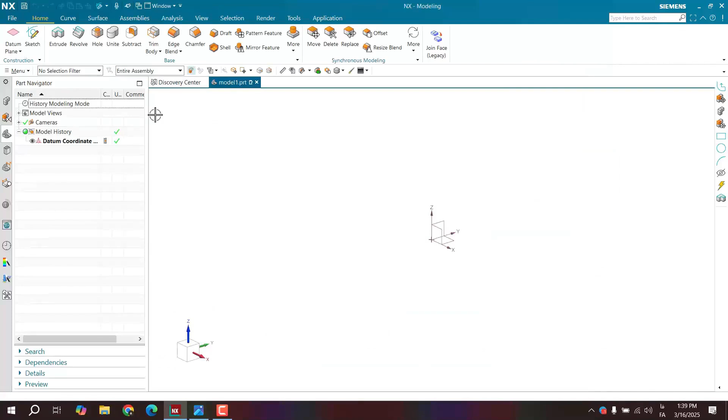This shape that we're looking at now has two axes of symmetry. One axis is this, and the other is this. So with these two axes of symmetry, I can draw a quarter, then mirror it twice and get the whole shape. We'll go with the same strategy. To start, we'll consider this as a coordinate origin. So I'll open NX, check the units. The units are in millimeters. Open a millimeter model and draw a sketch on, for example, the front plane.

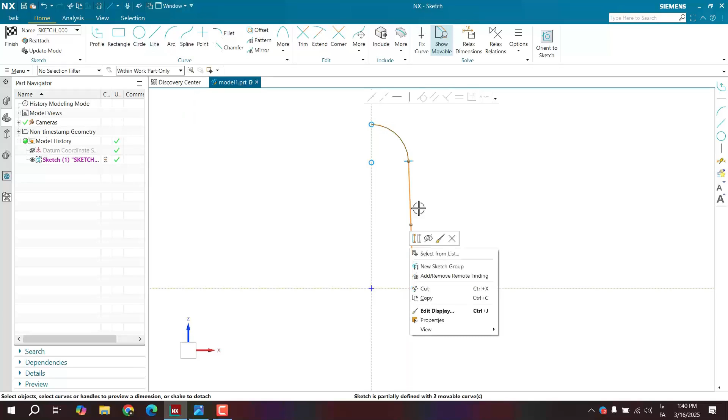So let's go draw it. An arc like this, a line down. How much is the radius of the arc? Yes, 20. An arc like this. Here you brought your line down and closed it. Yes, this line is tangent to the top, and this line itself is vertical. Now, why did this arc fall off? Let me delete it and move it around. Let's bring this down a little bit. From here to this to this. So this and this will be connected together.

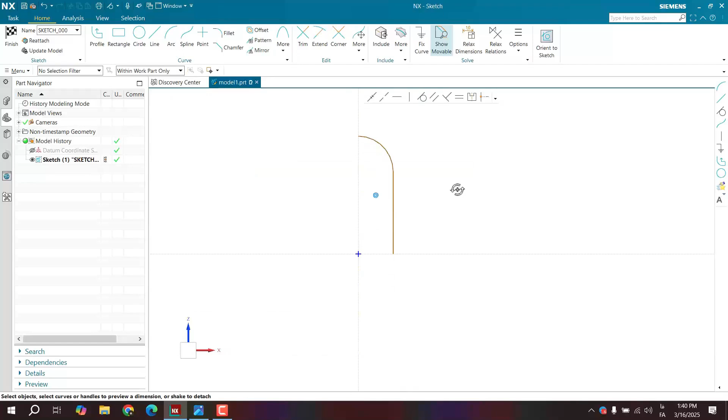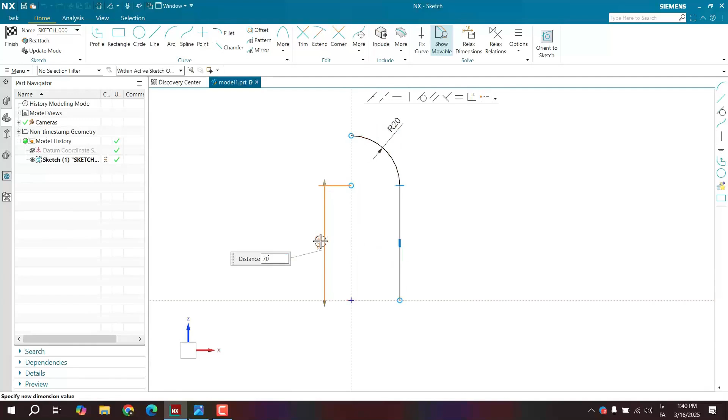Then what about the dimensions? How much was the radius? Yes, 20, and center to center, 140 divided by 2. So this radius is 20. Well, the first dimension always scales, so keep that in mind. The distance from the center to the bottom was 140, which means 140 divided by 2 is 70.

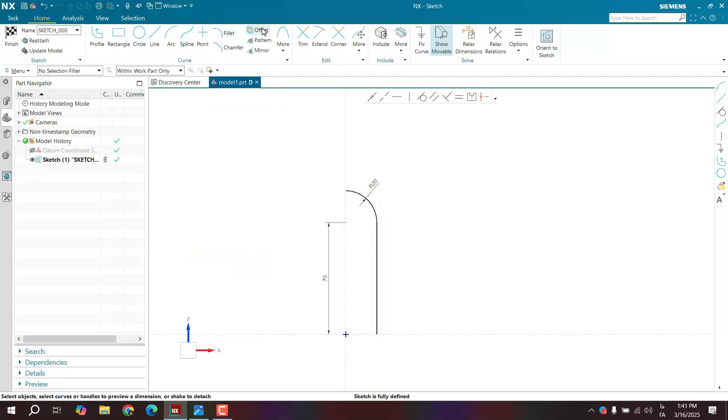All right, moving on to the next step, we need to create another arc that is larger than the one we've drawn, with an offset of 10 millimeters. We can apply the offset command, which will be explained in future videos. I can either choose it or we can draw it ourselves, but let's check the offset. I'm selecting the offset to be non-symmetrical, persistent relation, and not converted. I'm setting it to go outward, for example. I'll set it to 10. This radius is actually the same arc that you see here.

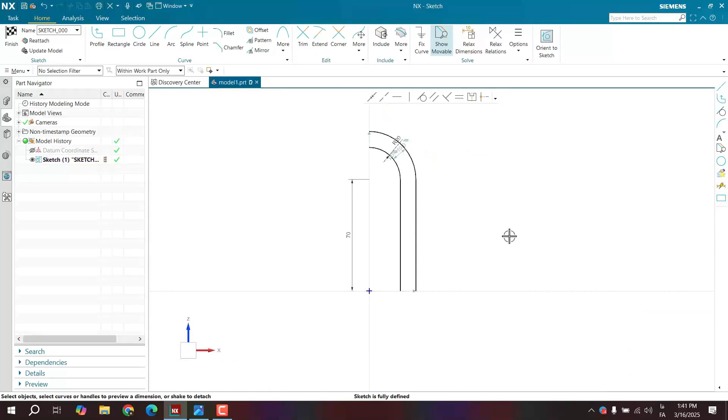So what's the next step? The next step is to draw this circle. Why a circle? Why not draw the arc? Always start with shapes that have a defined center and larger dimensions first, and then draw the connecting arcs. It's better this way. For example, I don't know where the center of this arc is. I don't have its coordinates. But this circle has all its coordinates defined.

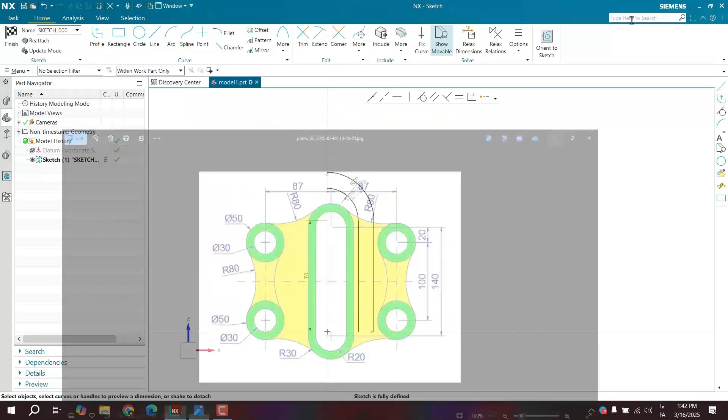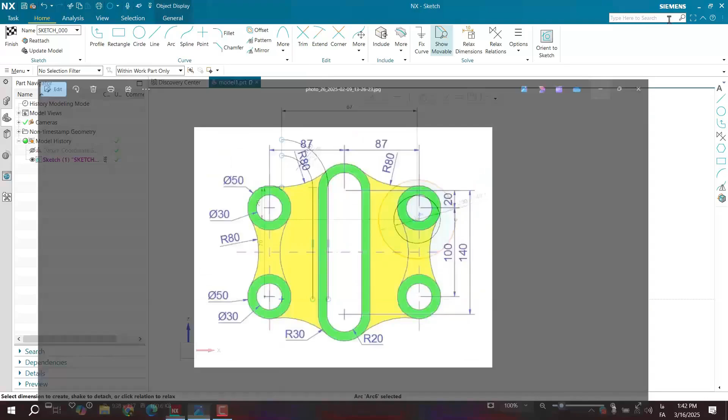We have a dimension of 20 and another dimension of 87 for the circle here. From its center to the center of this one, we have a distance of 20. And from here to here, we have a distance of 87. What's its diameter? It's 30 millimeters. So let's set that to 30. Now I'll draw another circle with the same center. How much is this? Looking at the drawing, the diameter is 50.

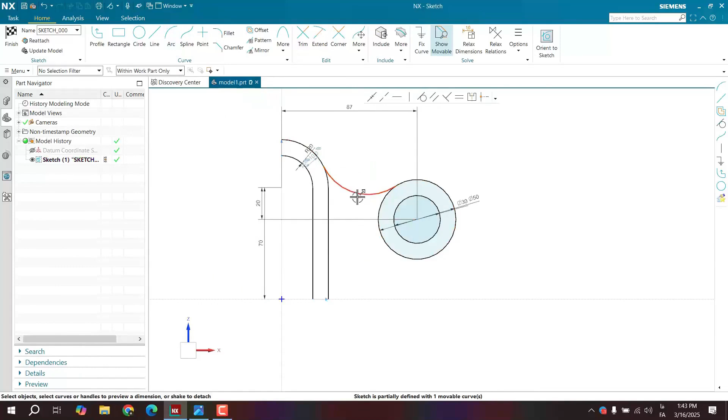The next step is to draw this arc, which is 80. Since I don't know where its center is, but I have the endpoints, I'm using the 3-point method. I'm connecting this to that and creating the arc. Now this arc is tangent to this one, and I'll make it tangent to this one too. What's the radius? The radius is 80. All right, that's it. Now, the sketch is fully defined, which is very important to me.

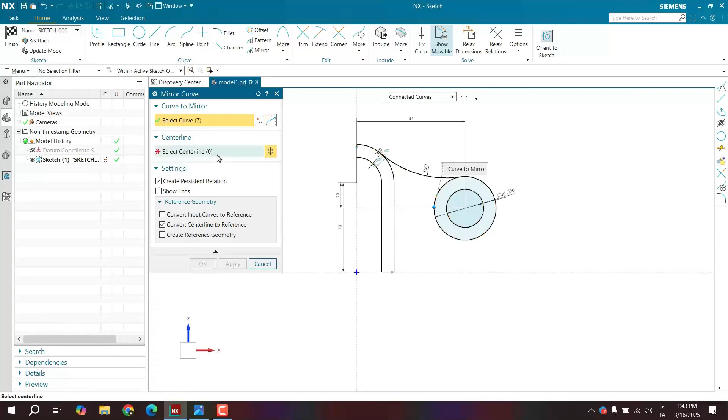Well, I'll look at this. What's this arc? Look, this arc, I don't have the bottom circle yet, so I'll draw it first. It asks, what exactly do you want to mirror? I respond by pointing out specific items: I want to mirror this particular object and also that one over there. Please make sure to connect them properly. Be cautious and ensure that you mirror it accurately with this item and that one, maintaining the alignment and symmetry as intended, to avoid any mistakes or misalignments.

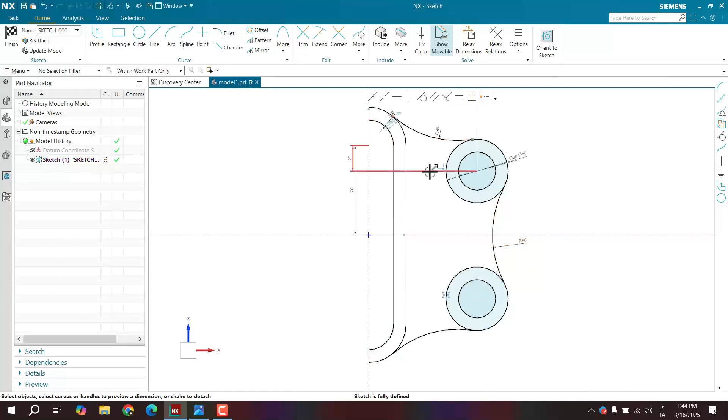Then I'll make this tangent to that. Now, how much is this? 82? Well, the upper one had a radius of 80. Great, we can make these two equal. I'll make these two equal. Now I've drawn this, and I won't draw this one. I'll draw a center line and mirror it. Look, I'm saying to mirror this line relative to this one. Yes, now this is done.

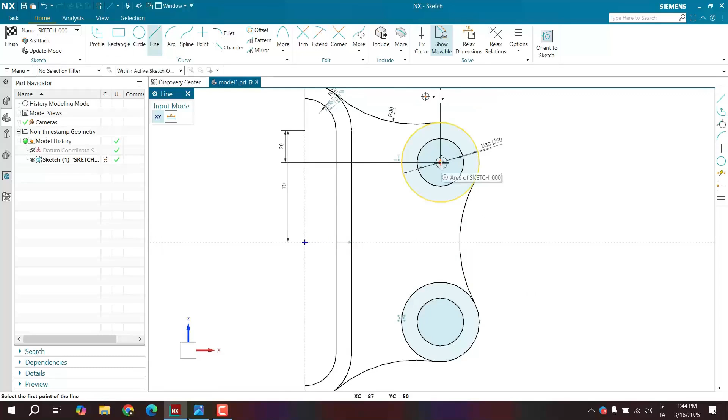Now what I need to do is mirror the entire shape again. It's in connected mode, so I'll select all of them. I won't select the dashed line; I'll hold down the shift key to deselect it. Look at this line. I say mirror it relative to this. Yes, now this is done.

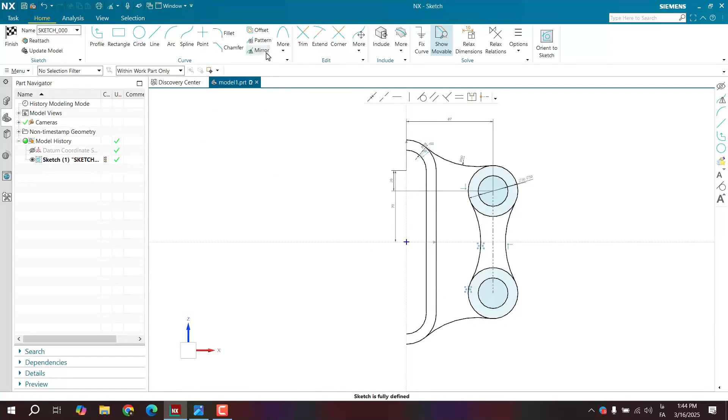What should I do? I just need to mirror my entire form again. It's connected. I'll select everything. I don't select the dashed line. I hold down shift and deselect it again. And I'm going to mirror these about this axis, and this is the shape that we were going to practice.